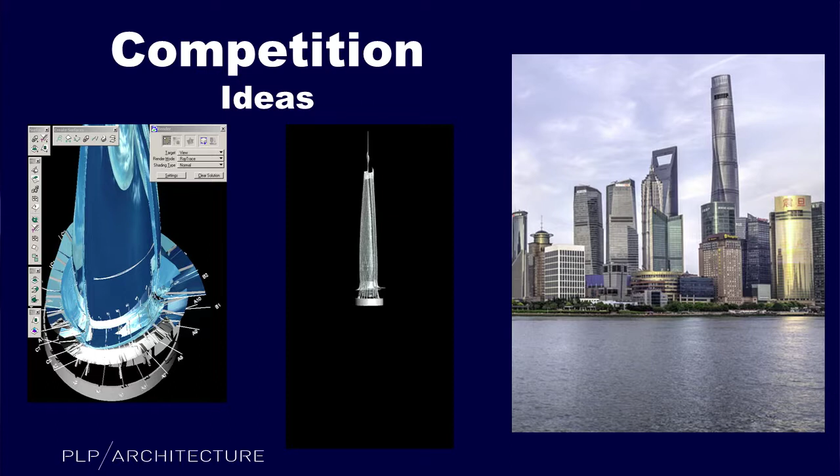So I do this occasional thing of doing shows. This is the one that Gensler saw my presentation a while back, and they built that building. Ours doesn't get built, but the important bit was that we were using interesting tools to develop the geometry - tools which we decided were worth pursuing with other people.

So I think, Jay, is he here? No, I'm not sure. So we formed the SmartGeometry Group - 2004 was one of our first events. That was about collaborating with lots of people to develop tools for this new world of interesting and complicated geometry, and of course CAD management and that kind of stuff.

I'm also co-chair of this event that happens in September, so I think you should all come to Gothenburg and participate. We got, I think, 17 workshops to choose from before the event itself, and the event is a two-day conference, so I hope you will look it up.

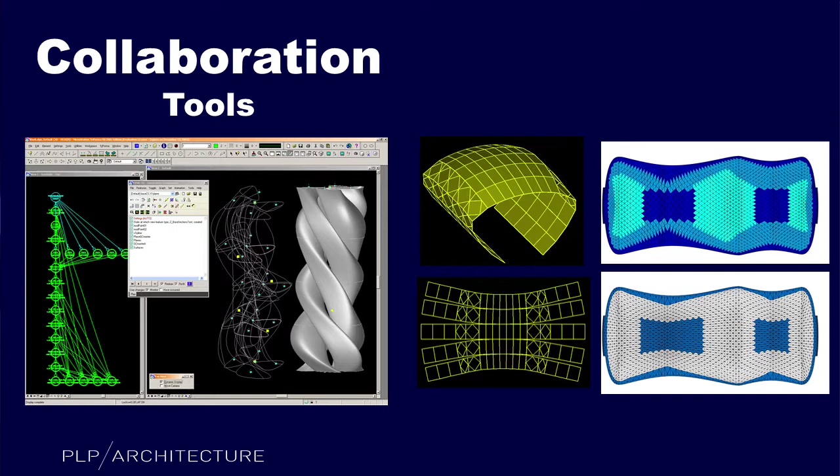These are the kind of tools being developed at the beginning of the SmartGeometry thing, like GC - generative components - and all the issues about folding, unfolding panels and that kind of thing. You think, well, do you develop your own in-house technology to do this stuff, or do you collaborate with other people to make sure that it happens out there? Of course, when you do that, you find that collaborating is a good idea.

This is the Crick Institute, so that roof was designed parametrically. Whenever the mechanical engineers came along and changed something, you change the parameter, you change the shape, you spit out all the drawings - and that is some of the models of the 3D roof. And they all look identical, don't they? But they're not identical - every one is marginally different from the other.

So when you start talking in more general terms, this is something I was presenting at Chalmers. I had 5 points to bring up. It's important to think about materials, and wood, of course, in Sweden is a very important material, and it has lots of interesting aspects - we'll talk a bit more about what we can actually do with wood.

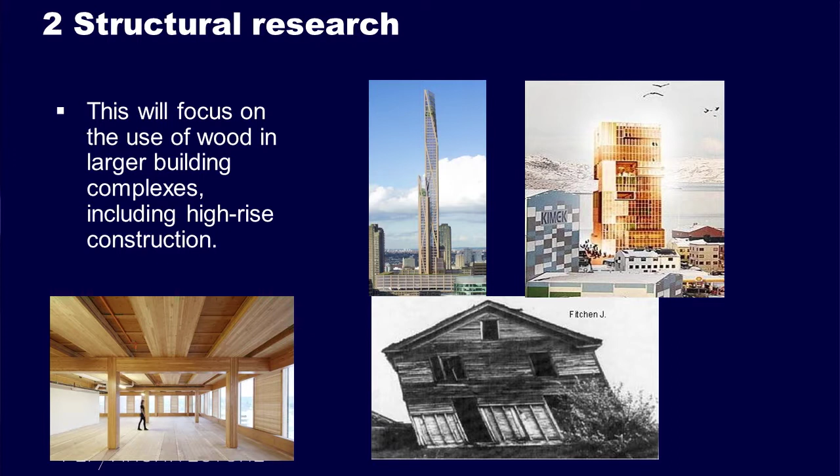Structural research is another area which is obviously very interesting. So timber tower is something that we developed fairly recently - of course, they've got interesting aspects about how buildings behave and all the rest of it.

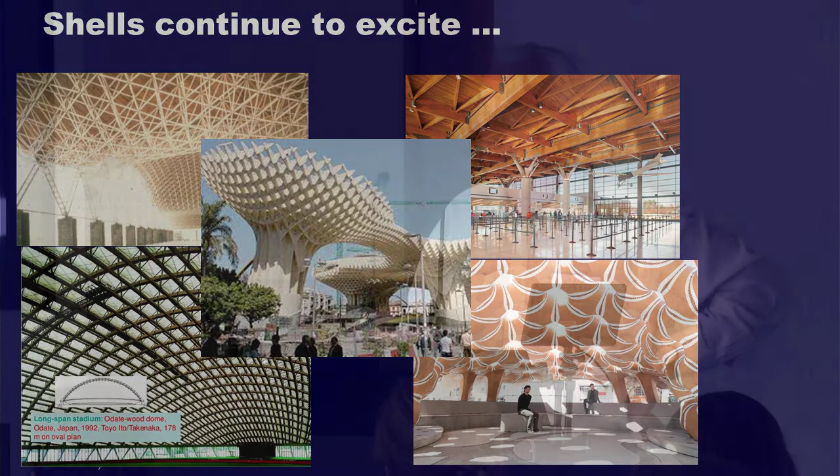Everybody loves shells, and shells are great, and everybody does very innovative things. My problem with shells, though, is that it's only really solving one-story buildings, and actually, most of the time, we're talking high-rises.

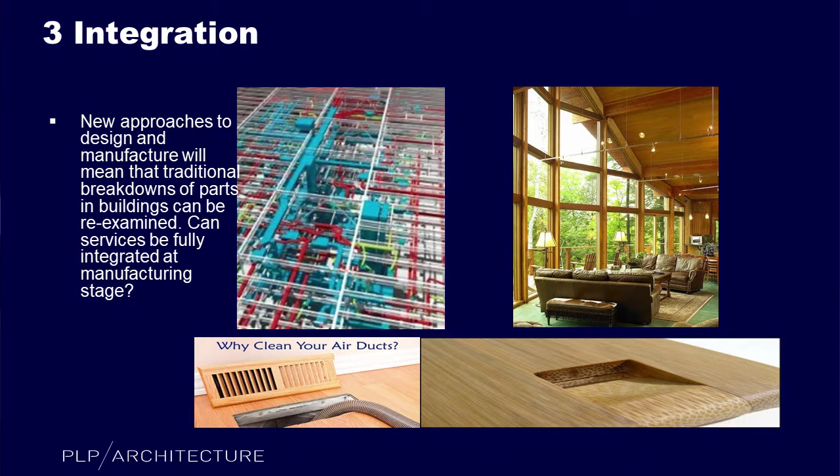I think this is an area where new technology will really come to the fore, which is integration of services within buildings, and rethinking entirely how services work and what they are and what they're for. So this is an area where, if anybody has an interest, it'd be very good to talk to them. Things like electric wiring - a completely crazy system. Why do we have electric wiring the way we do? Now, most innovation doesn't start within architecture.

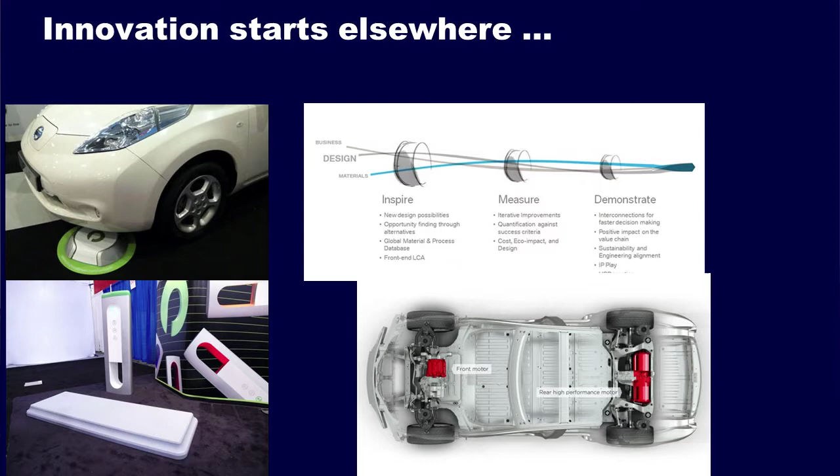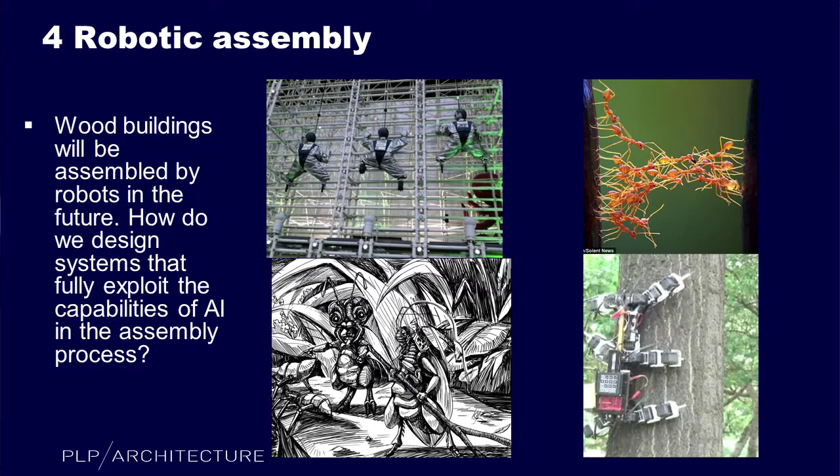It starts in other places. The car industry, and all these other industries, will have innovations that we'll want to use. And I think most critically, the robots are coming. Things like robotic assembly of buildings is clearly going to come along down the track in your area. When you talk about robots, you want to be on their side. Don't fight against them, bend them to your will, get them to work for you. That's what robots are for.

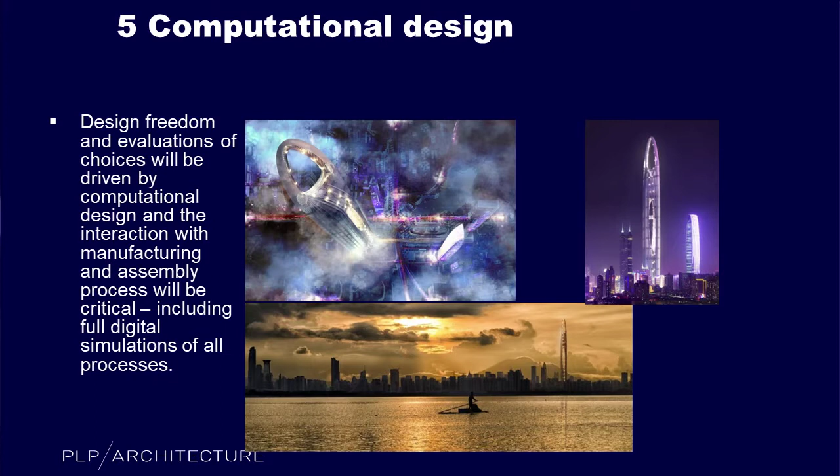So computational design is, of course, another thing. You can compute millions, if not billions, of alternatives, and how do you evaluate which is the best one. So this is some of our Skypod stuff.

Now, why do we actually innovate? I think this is where you really need to start thinking carefully about what you're doing. Things just don't work the way we want them to. I don't want to hang around and wait in a station for a train. I want things now, on demand. This is what the modern world is about.

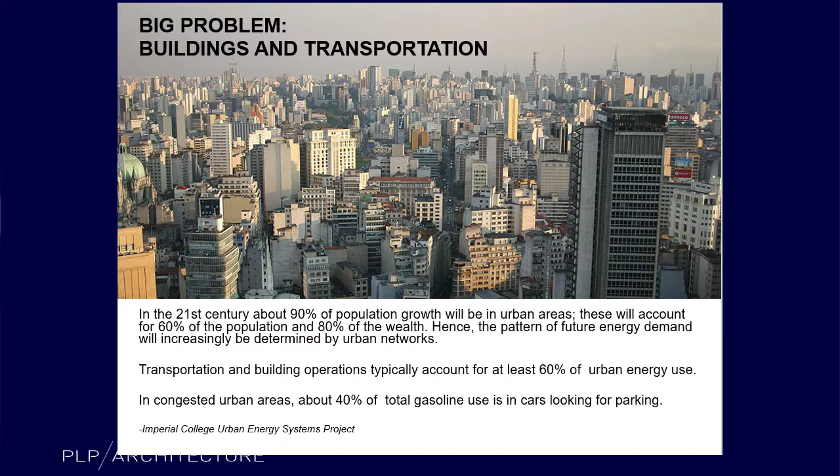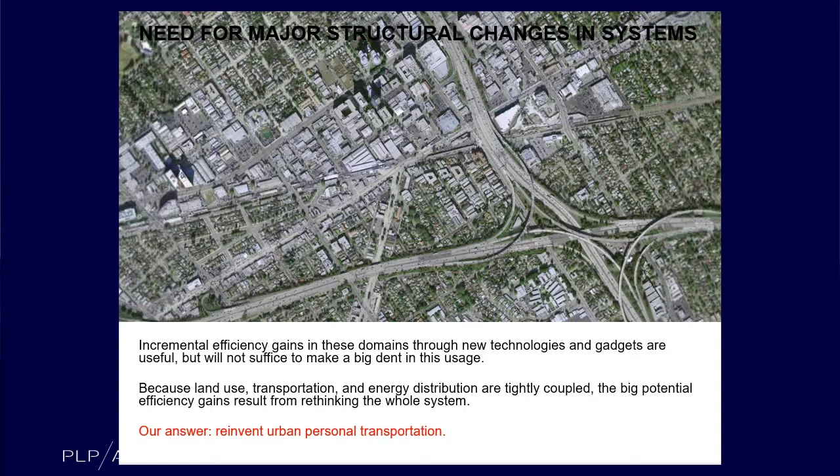And we have got huge problems. This is from Bill Mitchell, who sadly died a couple of years back. He was at MIT, and I've been inspired a lot by his work. Urban transport is one of the absolutely critical issues about how we're going to behave in the future. You can see all the kind of issues that arise with the transport systems as we have. How do we actually change radically the way we think about transportation is one of my things that I bang on about.

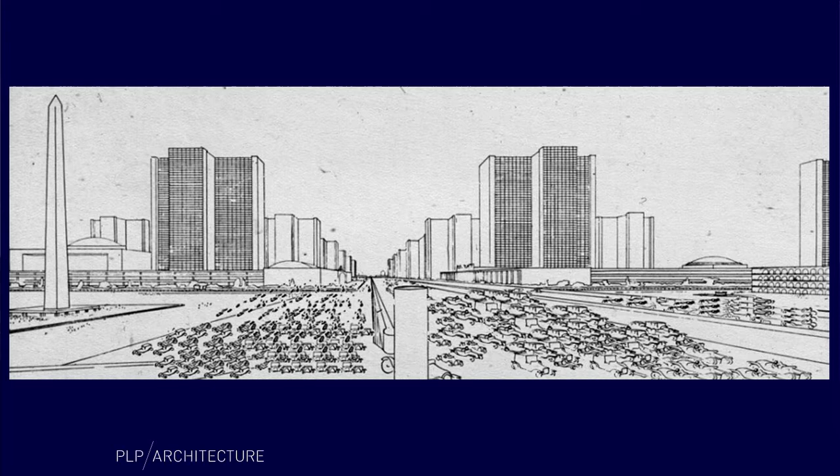So why are cities so large? What's the whole point of having big cities? Well, it's a mathematical issue, and it's very, very simple. The size of any set of people, the connections between them goes up exponentially. So in big cities, you have hugely more choices about who's your partner, who do you work for, or do you specialize in something or other. If you live in a small city, you might only find one employer. If you live in a big city, you can work for PLP, or you can work for Allies and Morrison, or you can work for Foster's. This is why cities are big. And there is no real limit to that, because the bigger you get, the more opportunities there are. Therefore, big cities are going to go on growing and will probably take over the world.

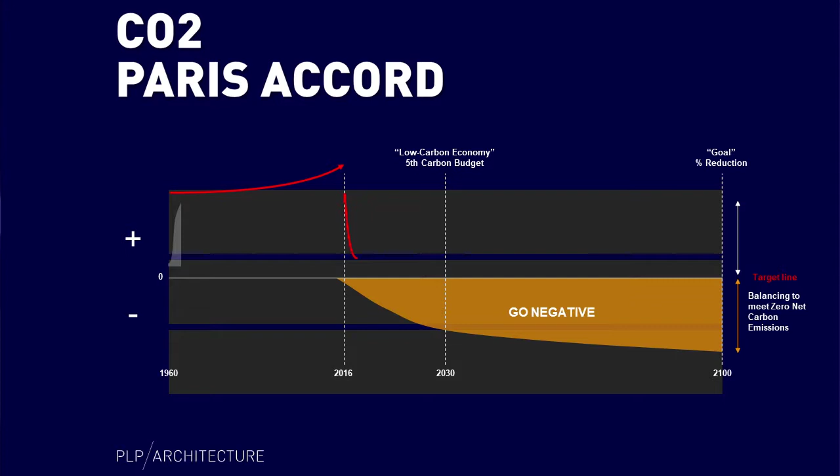So then, of course, we have got this other downside. I believe that tomorrow we have a gentleman landing - actually he landed this afternoon - who doesn't believe this, and I think he's wrong. If any of you feel like assembling tomorrow outside here and marching down to Trafalgar Square, please do. We do, definitely, as architects, have a responsibility to deal with a lot of these issues.

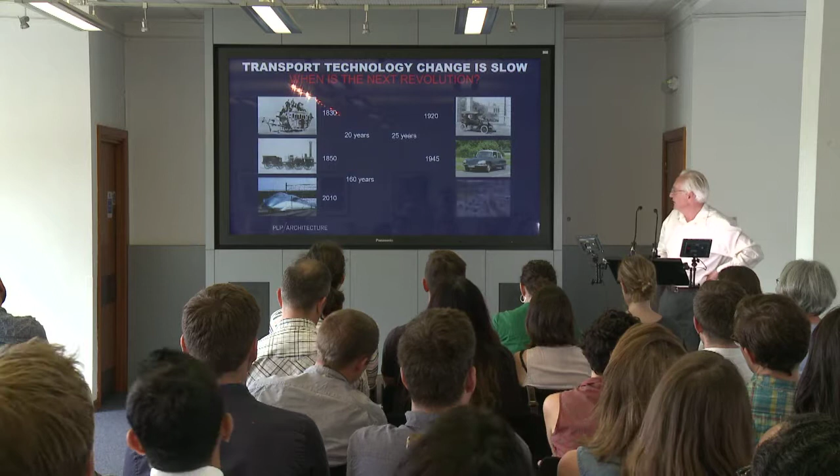So technology, this is one of the kind of issues that are weird. Transport technology develops so slowly, it's ridiculous. 20 years, 25 years, and then it takes 160 years to get to high-speed trains, whereas we built the motorways in 65 years. So suddenly you think, hang on a moment, did we suddenly choose something different a while back? And the answer is yes, of course we did.

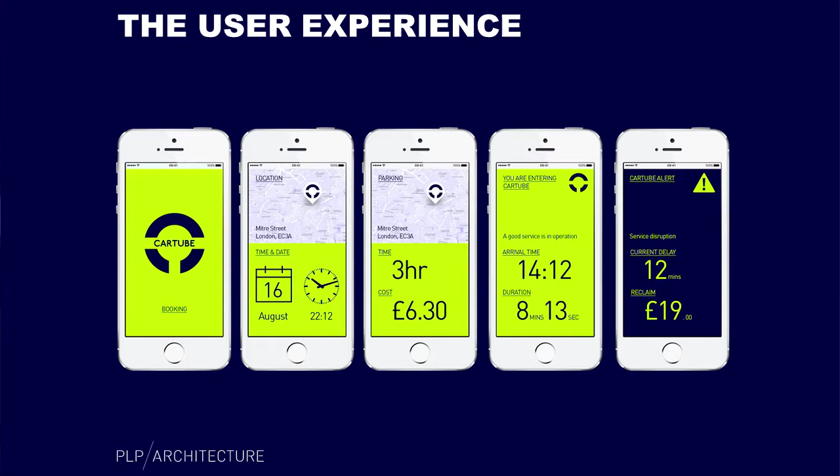And one of the things we chose is actually basically cars. Cars means that you have individual control over what you do, and you don't have these huge objects that take over everything. My bet in the future is flexibility will win. Flexibility is what everybody's looking for - I want it when I want it, here on demand. So obviously it'll be available, whatever you do will be available from something like a smartphone.

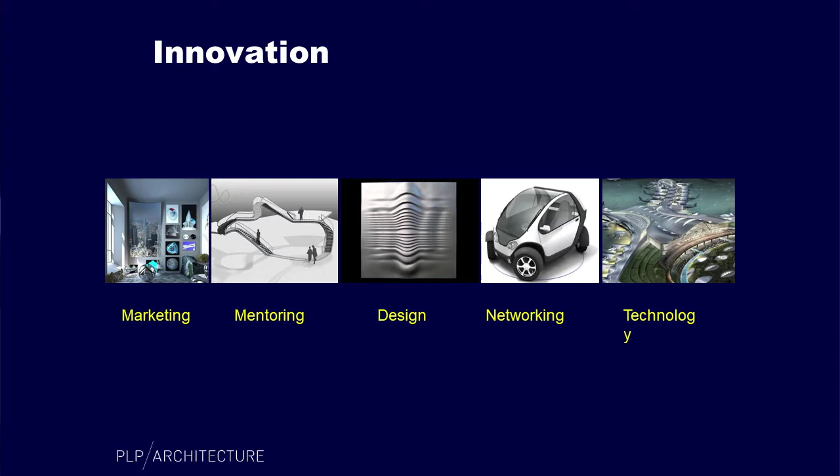So these are some of the slides I picked up from the past, and that's the Abu Dhabi airport that my team did the geometry for. These are, of course, the various areas that you have to think about carefully when you do these things.

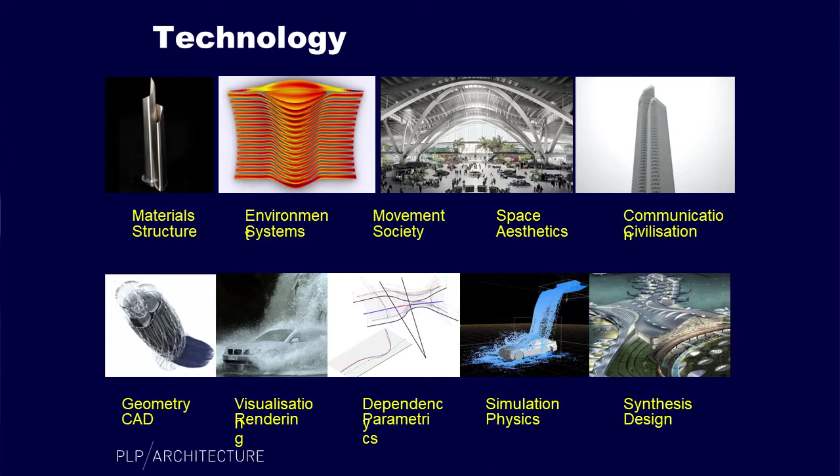So what kind of technologies are you going to have? Well, you've got geometry, CAD, that's already there. Everybody's doing that. Visualization and rendering, everybody's doing that. This slide was prepared back in about 2000. Parametric design, that's now widely available, pretty well everybody's got it. Simulation, yes, everybody's pretty well doing that.

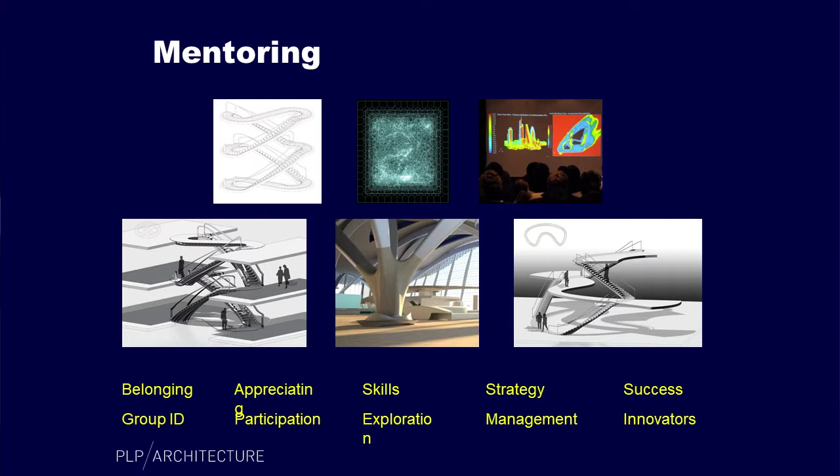So the synthesis is, of course, how you think about design and what you think about it. We need to think about materials, environmental systems, movement systems, movement in society, aesthetics, and communication, how we civilize that. And of course, you need to develop a thought process about how you investigate and how you work with various people, and what are the kind of things that you need to pick up and do in order to do these things.

Oh yes, there's Jay. Is Jay turned up? Yeah, there's Jay, Jay is at the back. Okay, so he was one of the creators of the smart geometry.

Okay, so one of the interesting things about timber is, of course, it's ecologically very good, but the one big issue with it is drying the damn stuff. So if any one of you has got a really good idea about how you dry out timber, please tell me and we can do something about it.

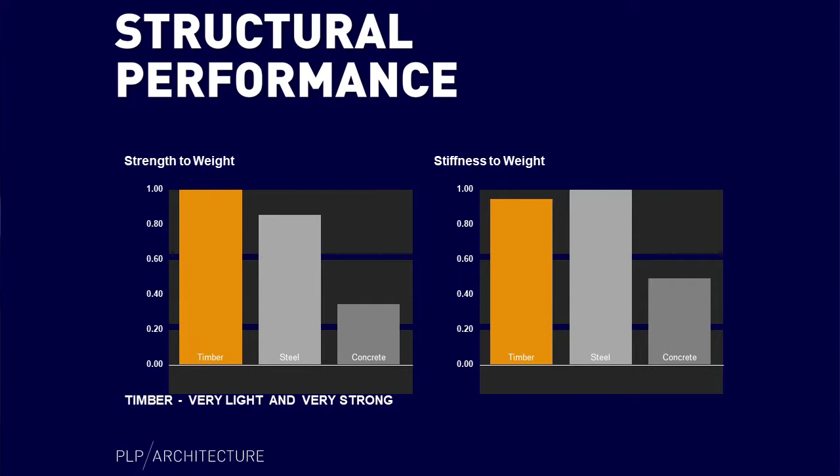Okay, so strength to weight and stiffness to weight. It's surprisingly strong wood, it really is. So when you start looking at the structural material, you can begin to think about comparing it with other materials like steel and concrete.

So 40% less waste because you can recycle the stuff. And this is an interesting one, is weight. When you build something in central London, the weight of the building matters a lot because you've got to put it on a lorry to bring it here. Also, of course, you've got to build a foundation, and the foundation is proportionate to the weight of the building. So lighter buildings make a lot of sense, and it's quicker to build as a result of that.

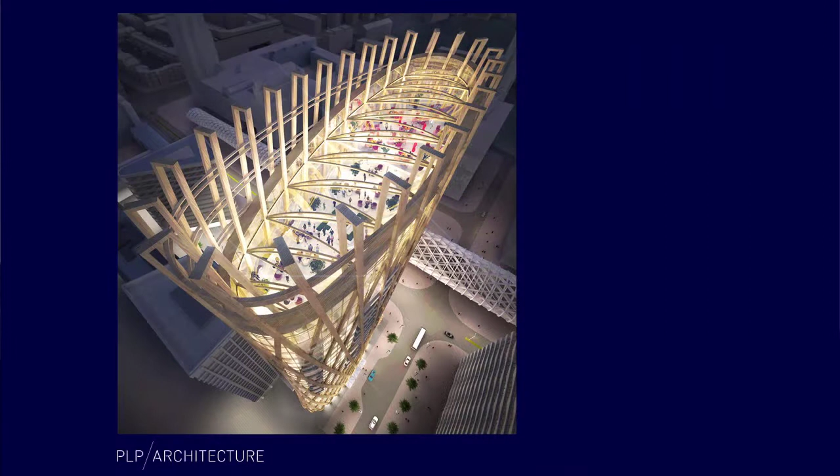So this is our Oakwood Tower, some slides of that. That's Kevin Flanagan, one of the partners who has been developing that, and this is another development in a place I can't tell you, for a client I can't tell you.

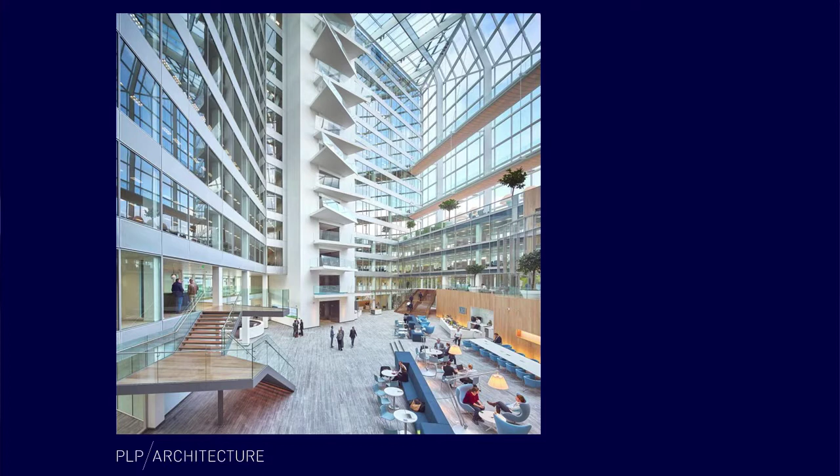This is Deloitte's headquarters in Amsterdam, which is the most sustainable office building in the world. So it creates all its own energy. It's got photovoltaic cells on the other side. This is the atrium, which actually people love, they adore it. It's north-facing, which is one of the big issues, and it changes, of course, its character with the light. And of course, this is a very intelligent building.

Some of our competitors set up a lab the other day, and they said, it's terrible, most buildings only have one sensor. This building already has 12,000 sensors. Every single light fitting has got a sensor in it. And so it talks to each other, and the building knows about things like how it's going to be occupied. So if, for instance, one day it's not going to be very occupied, it closes down the floor and doesn't use it. The building itself knows this, or the AI behind the building.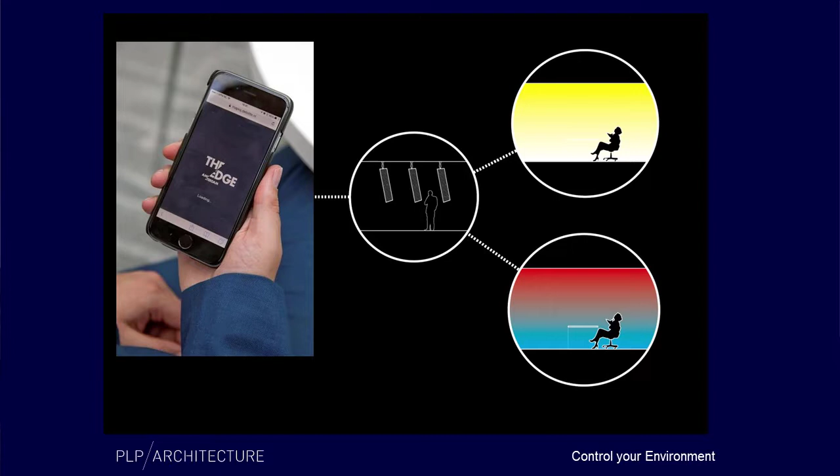So, of course, it will also know about your preference for heating and cooling and so on, and it will carry that preference along with you, depending on where you happen to be wanting to go. And you, of course, connect to the context, which is all the services that you require outside the building.

What you're about to see is not science fiction, it's science future. We have an urge to build ever taller buildings. Partly this is economics, and partly an expression of human spirit and aspirations. Tall buildings use less land and are the core of any successful city.

Their shapes define the skyline and the signature of the city. So what limits our ambitions when it comes to the shape? The critical design issue is how lifts function.

Today, they simply go up and down vertically in shafts. This topology is unlike any other transport system. All other systems have multiple vehicles in one-way track. This is by far the most efficient way of organizing transportation. By redesigning the track to be similar to a funfair ride, we suddenly have the opportunity to have complex paths for a novel lift system, the Skypod.

Unlike a funfair ride, we want a smooth, stable platform. In practical terms, this means a pod which can rotate in two planes so that the floor is always horizontal, although it can tilt to achieve a comfortable ride, such as when traveling around corners or accelerating. The critical issue is how the pod is entered. We have settled on having 3 potential axes, 1 through the back and 2 on the longitudinal axis. These are there to allow different types of stops.

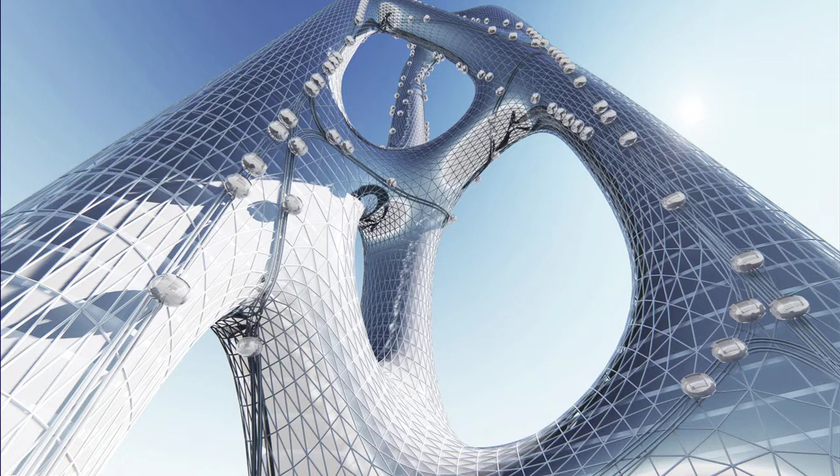Right, so this is one imagination about the kind of forms that you can begin to develop. I'm not saying we're necessarily going to do this, but the point about it is we've been so constrained by lift technology, we haven't dared to think about really interesting shapes.

Right, so here's another interesting shape. Kilometre-high building. Incidentally, that kilometre-high building, you will find it in the Royal Academy in the exhibition. There's a model of it there.

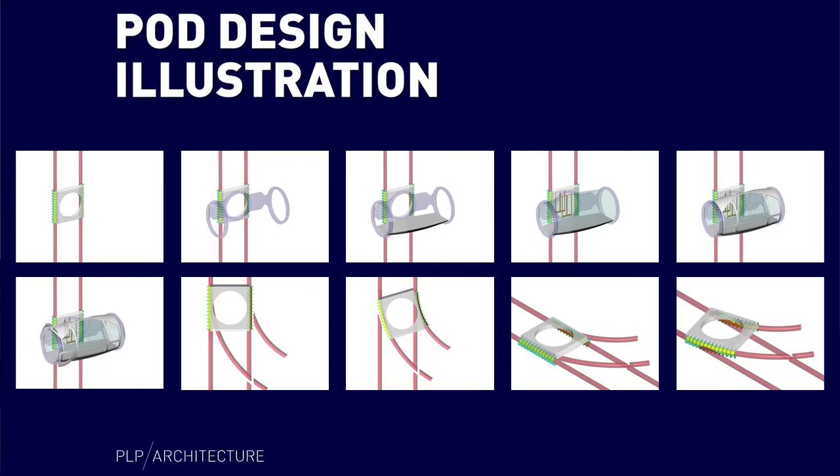And so this is how the technology could conceivably work. So it's a track system, and of course it's got switches. I'm quite proud of the switches because they have no mechanical moving parts. It's all done magnetically. So this is the kind of thing I think. So of course, what's really important is you have got to be able to have torsion, because torsion is the only thing that allows you to change plane.

And this is a typical slide.

And now welcome to the future. Today, streets are dangerous places. Our children can't play there. Cars are far too dangerous. But maybe we can change all that. Autonomous cars are coming. They'll be so much safer. They will refuse to run over a child that strays into its path. And they will need far less space. You can put that space to good use. Playgrounds, trees, cycle paths. Finally, the street will again become the heart of the community.

Well, how will this reality come to be? Meet the car tube, a new mode of urban mobility that fuses two technologies, mass transport and automated cars. Car tube works a bit like the internet. Its roads are the optic fibers, their intersections are the switches, and the cars are the information packets. This means direct travel without interchanging. The stop-start model of current transportation is replaced with a fluid, integrated network.

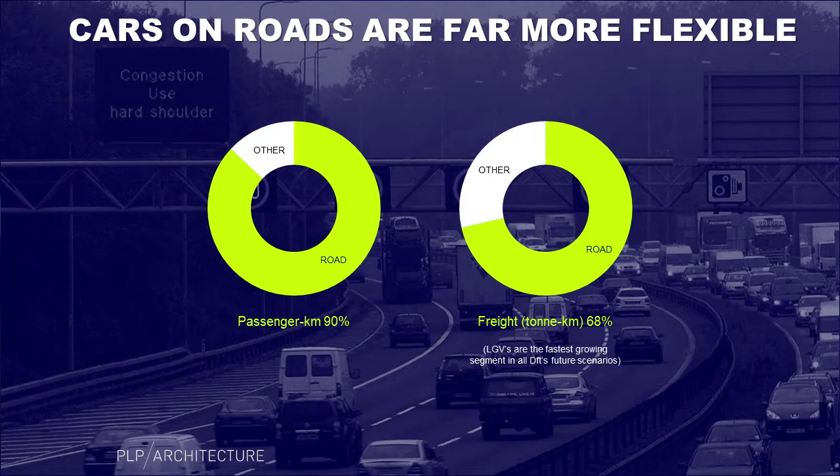And this is the point. We've already chosen. Almost all transport takes place on roads already. We, as a society, have already chosen. But we've chosen a system that is polluting and dangerous, and I think we need to change that.

So I think I'm going to stop at that point, and we can talk about other things later on. Okay, thanks.